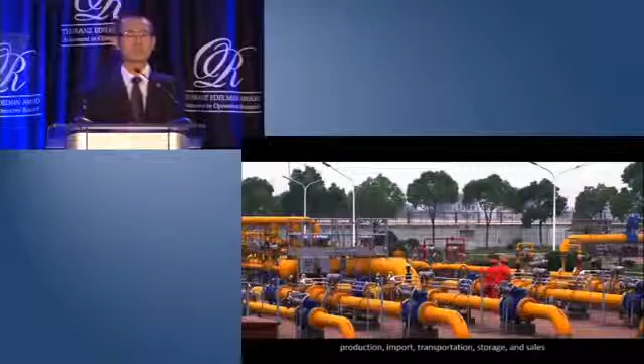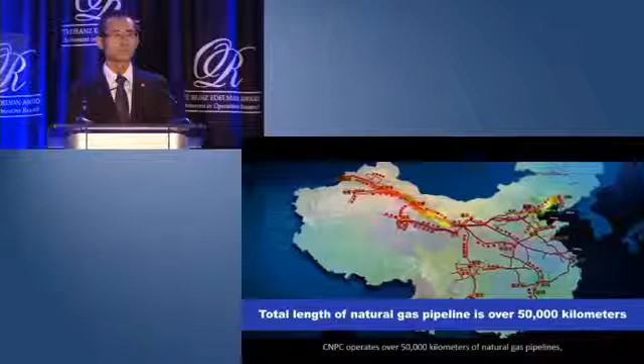CNPC, China National Petroleum Corporation, is China's largest oil and natural gas producer and supplier, and is an integrated energy corporation with business covering natural gas production, import, transportation, storage, and sales. In 2014 to 2017, CNPC ranked the top 4 in Fortune Global 500. CNPC operates over 50,000 kilometers of natural gas pipelines, which is the second largest natural gas pipeline network owned by a single corporation around the world.

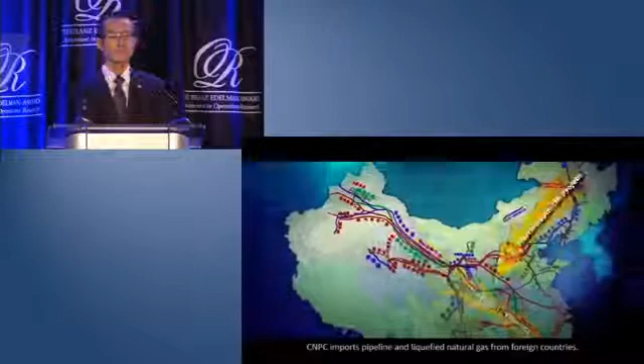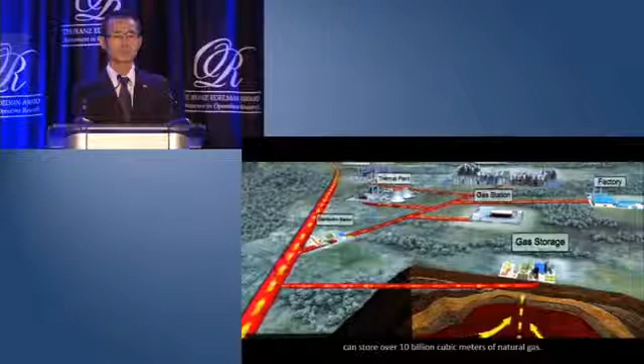CNPC has built 4 major natural gas fields in Sichuan, Tarim, Changqing, and Qinghai, with an annual production capacity of more than 100 billion cubic meters. CNPC imports pipeline and liquefied natural gas from foreign countries. Each year, CNPC delivers over 150 billion cubic meters of natural gas to over 5,000 end users all over the country. The underground natural gas storage owned by CNPC can store over 10 billion cubic meters of natural gas.

Okay, Professor, please. As we can see from the video, CNPC plans to play a major role in promoting natural gas in China. However, as of 2014, it was unclear whether China's pipeline network had sufficient capacity to meet the increase in demand. It's not easy to answer this question, mainly because of two reasons.

First, there are thousands of nodes in the network. The network is interconnected and forms many cycles. Second, the physical laws governing the relationship between flow and pressure in the pipeline are highly nonlinear and non-convex.

To help CNPC make better decisions about their pipeline network design and supply chain optimization, we plan to answer the following two questions. One, how much natural gas can be transported by a given network? And two, what is the optimal transmission plan based on the location of the supply and demand and the different purchasing and sales prices in the network? We plan to address these questions by integrating flow dynamics equations into an optimization framework.

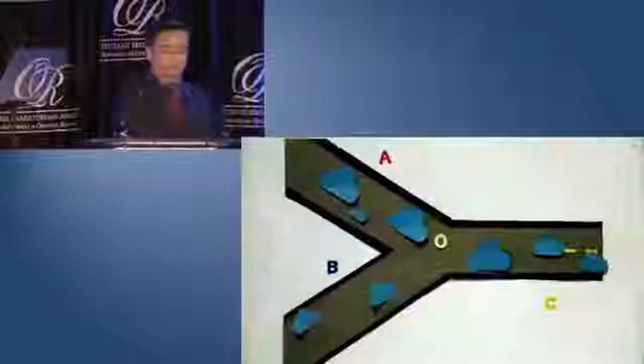In a road network, the control is the number of vehicles per unit time. But in the natural gas pipeline transmission, the control is the gas pressure. If the gas pressures at nodes A, B, C are all 8 megapascals, natural gas stays static. If node C's pressure decreases to 6, natural gas starts to flow. If node B's pressure increases to 10, gas flows from B to A and C. When we change gas pressure, the flow directions and the gas flow rate change simultaneously and non-linearly.

Different from vehicle traffic, natural gas cannot just flow by itself. We need to control gas pressure and temperature to control the gas direction and flow rate. The relationship among gas flow rate, pressure, and temperature is non-linear and also non-convex.

Assume that we need to transport 10,000 cubic meters of natural gas from Xinjiang to Beijing in 1 month. We set the natural gas pressure at Xinjiang at 8 megapascal. As natural gas flows to Shanxi and Beijing, its pressure decreases to 7.5 megapascal and 5 megapascal respectively. What if the pressure at Beijing cannot be lower than 6 megapascal?

The first solution is to increase the natural gas pressure at Xinjiang so that the pressure at Beijing is above 6 megapascal. The second approach is to build a compressor at Shanxi to increase its pressure.

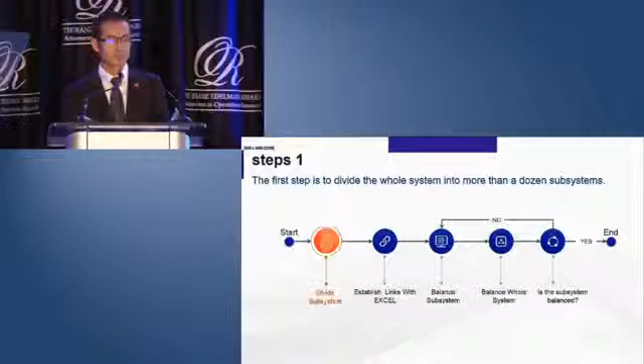Okay, before this project, we used the manual method and Excel to solve this problem. The next video will show us how we did it. The first step is to divide the whole system into more than a dozen subsystems. The second step is to establish the internal balance of production, transmission, storage, and sales amounts within each subsystem by using Excel.

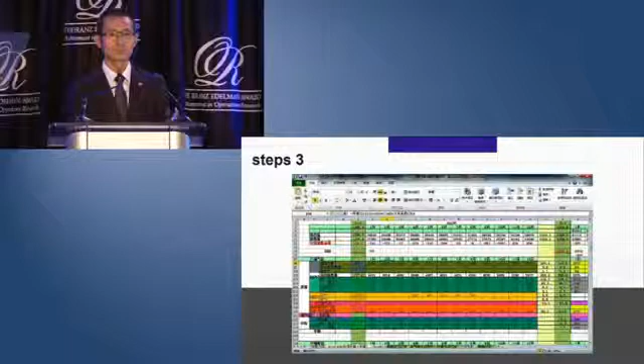The third step is to adjust the decision made in the second step based on management team's experience and feedback. The fourth step is to seek a preliminary balance among the production, transmission, storage, and sales amounts in the whole system by adjusting the interflows between each subsystem.

The fifth step is to check whether the amount of natural gas in each subsystem is balanced according to the preliminary balance of the whole system. If not, we go back to the second step and iterate.

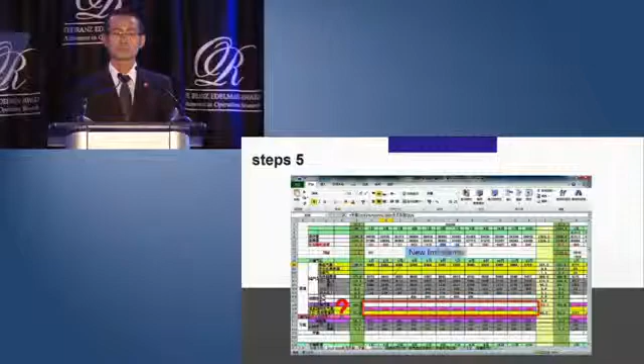Okay, the disadvantage of this manual method was that it might take too many iterations, both in the whole system and subsystems. It also relied too much on the engineer's working experience. So, different people often obtained different results. Most importantly, it did not guarantee the maximization of profits.

Furthermore, the manual method did not give us different or more scenarios. So, the next video will show us the disadvantages in detail.

We encountered a major management problem in 2012 when planning the natural gas usage for year 2013 to 2020. We divided the whole transmission system into 15 transmission subsystems and assigned the associated flow balancing tasks to 8 engineers. Each engineer was responsible for the flow balancing of his or her assigned subsystems.

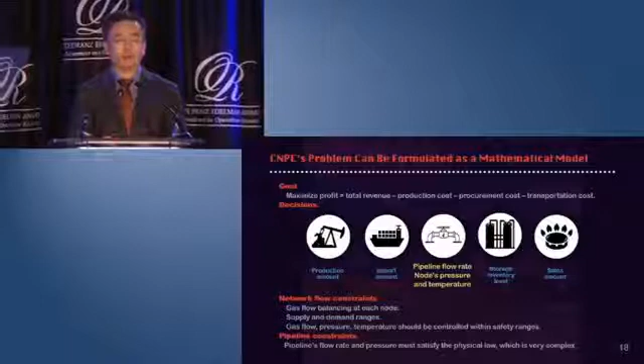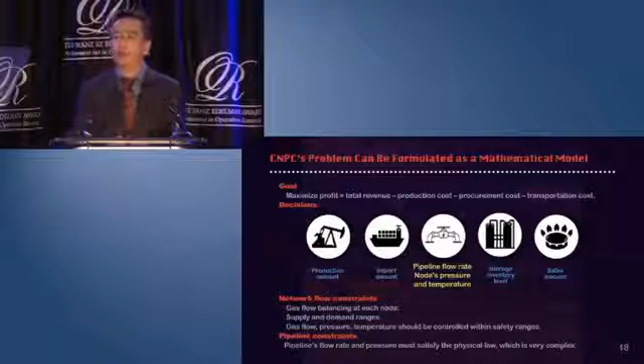It became apparent that the manual method will not work anymore for CNPC. Instead, our team came up with a supply chain optimization model where we try to maximize the profit by integrating production, import, storage, and sales decisions in the whole supply chain.

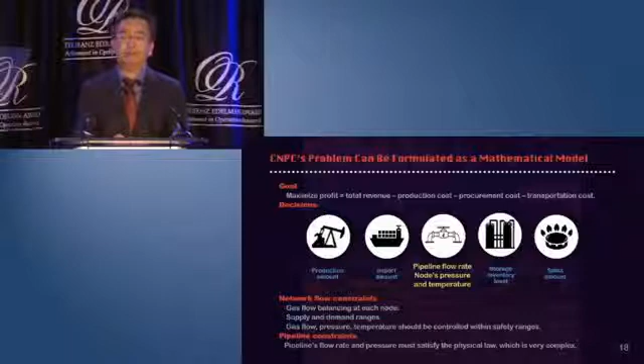If you look at the diagram, the key difference between this gas supply chain versus our textbook supply chain lies in the yellow part, where we explicitly model the pressure and the temperature and how they influence the flow in the network. We want to make sure the model will satisfy these two constraints.

In the network flow constraints, we want to make sure the gas flow is balanced at every node. Supply and demand fall in the right ranges, and gas flow, pressure, and temperature are controlled within the safety ranges. And in the pipeline constraints, we make sure that the pipeline's flow rate and pressure satisfy the following dynamic equations.

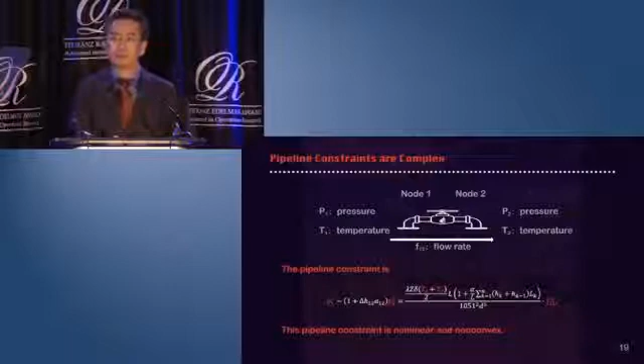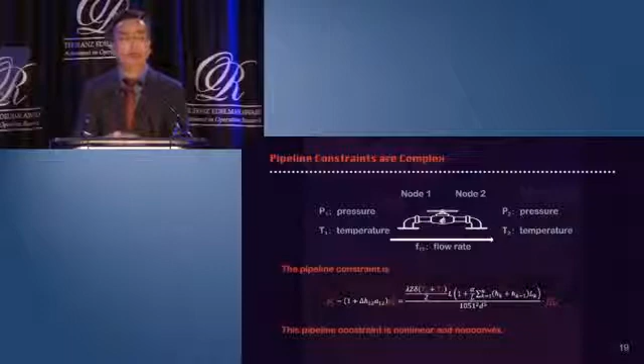The pipeline constraints that you can read from the PowerPoint are very complex. We just give you a simple example with only 2 nodes. Node 1 has a pressure of P1 and temperature of T1, and node 2's pressure is P2 and temperature is T2. And the gas flow from node 1 to node 2 can be expressed as a function of P1, P2, T1, and T2. It is clear that this constraint is nonlinear and non-convex.

On top of this nonlinear and non-convex constraint, there are several other factors that make the CNPC natural gas supply chain problems even harder to solve. The next video will show you all these complexities. The elevation difference between Xinjiang and Beijing is over 2,000 meters, which has non-negligible effects on gas transmission.

The demand in winter in China can be twice as much as the demand in summer. Price of gas imported from different countries varies much. Pipelines of CNPC form a large-scale complex network, which increases the complexity of the whole problem.

After considering all these complexities, we end up with a large-scale, nonlinear and non-convex mixed integer programming problem. This model has about 37,000 constraints and 15,000 variables. No existing commercial software can solve this problem.

Instead, we came up with two approximation methods to solve this complex problem. The first approach is a piecewise linear approximation, and the second approach is a three-stage convex relaxation method. In approach one, we approximate the nonlinear problem by a mixed integer linear programming problem.

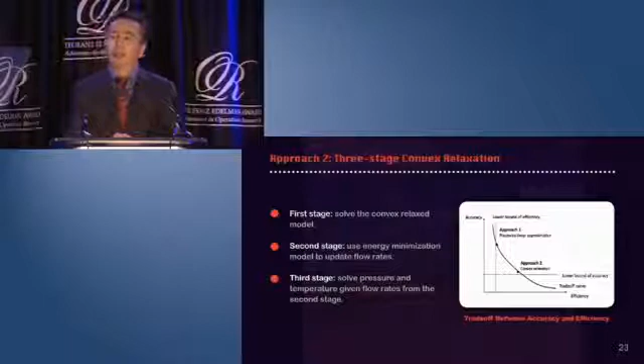In approach two, we use a three-stage convex relaxation approach. We first solve the convex relaxed problem. If the solution from this relaxation is not feasible, we then solve an energy minimization problem to get a feasible solution. And in the last stage, we solve for pressure and temperature given the flow rate from the second stage.

These two approaches have their own pros and cons. Approach one has higher solution accuracy, but requires a longer time to calculate. Approach two has higher computational efficiency, but is less accurate than approach one.

To validate our model and solution method, we have to answer the following two questions. First, can our model reflect the real pipeline characteristics? The answer is yes, because our fluid dynamic models are based on industrial standard and verified by field experts. And we further validate our results by comparing them with those from the specialized pipeline simulation software.

The second question is, can our approaches, our methods guarantee feasible solutions? For the linear approximation method, we use up to 20 segments to guarantee solution accuracy. For the convex relaxation problem, we first prove theoretically that we can find optimal solutions if the network structure is simple, such as a tree network.

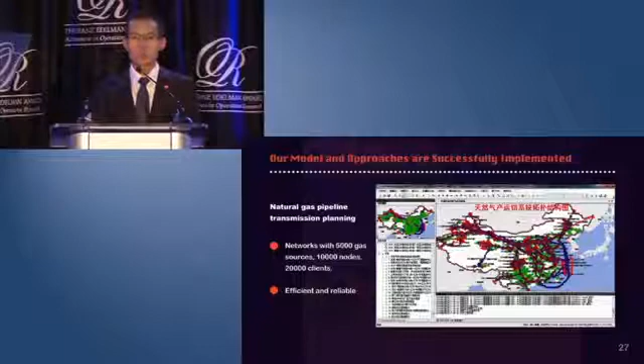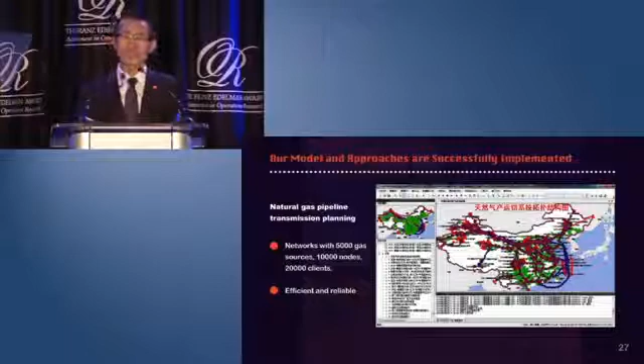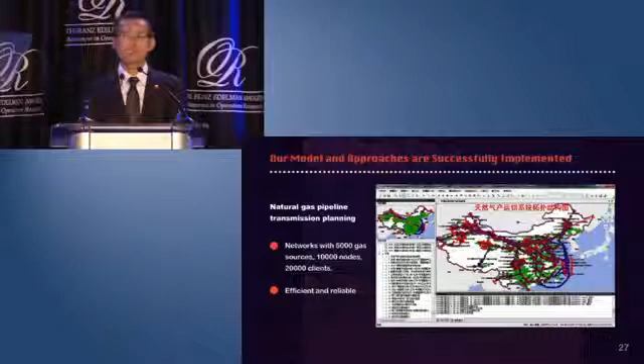Okay, based on the methodology introduced by Professor Sun, the project team developed a software to make plans on natural gas pipeline transmission in networks with any topology. The software can provide reliable plans in transmission systems with 5,000 natural gas sources, 10,000 nodes, and 20,000 clients efficiently.

Next, I will show you the basic functions of the software. The decision support system has 5 components: data input, data check, unit conversion, optimization, and data output. Data are first imported from the database into the optimization system and stored in the memory.

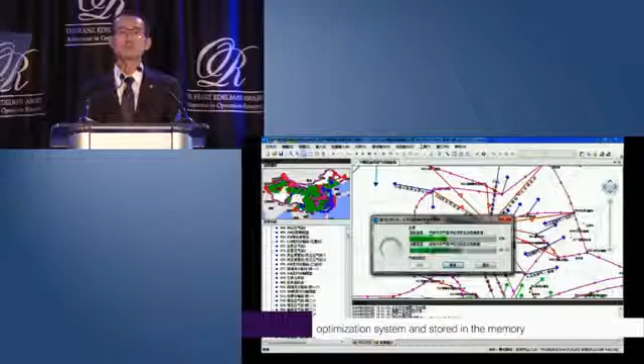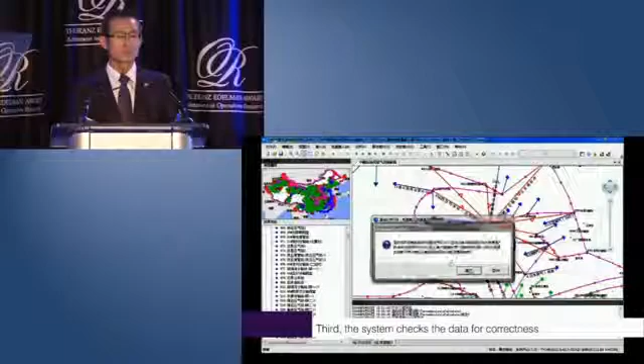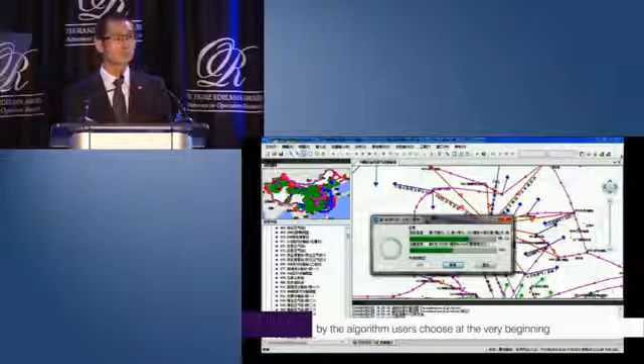Second, the original numerical data are converted into data with standard units. Third, the system checks the data for correctness. Then, the natural gas pipeline planning problem is optimized by the algorithm users chose at the very beginning. After the calculation is finished, the results are converted and output.

During software development, we worked to provide more choices for users and make the software interface more user-friendly. First, the main interface displays the pipeline network loaded from the database. In the software, the geographical information of each node is stored in the database.

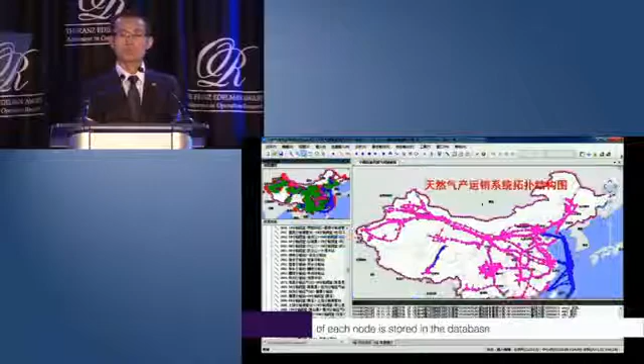The design is similar to that of commercial map software. The user can move, enlarge, and shrink the network similar to using a Google map. A user can also click on each node and arc to check its information.

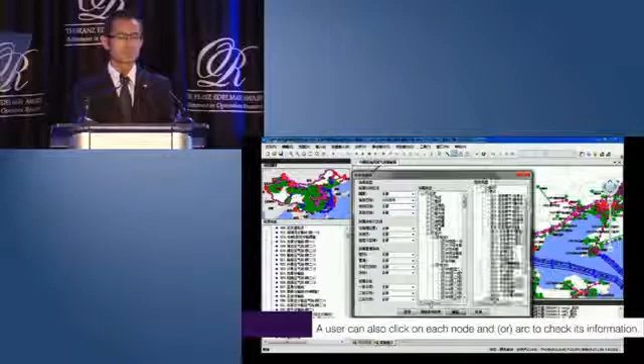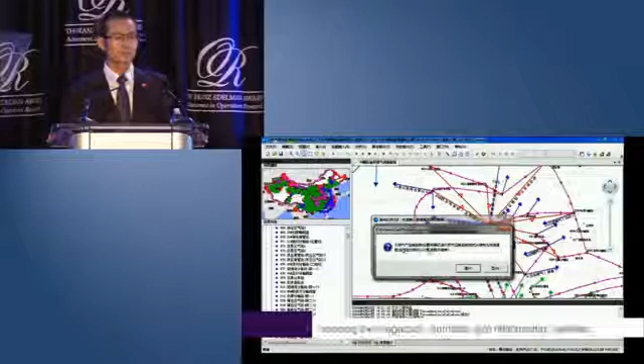Second, when the software is initialized, a user can select the objective functions and other system settings. For example, the objective function can be either linear or piecewise linear, and the physical parameters can be computed in various ways. Third, the team designed 9 levels of data checking, including magnitude, conflicts, size relationship, overlaps, network topology, and checking module required by other software like TGNet. Software is designed to give the error prompt and let users choose whether to continue the calculation.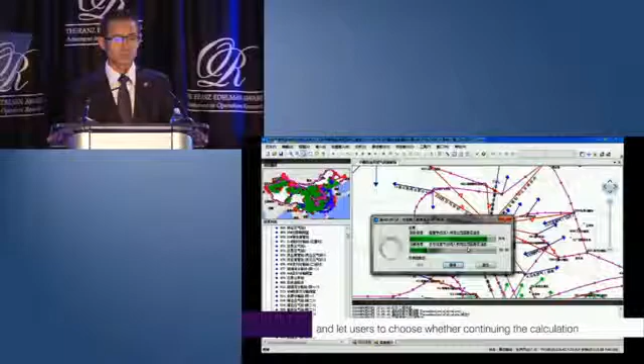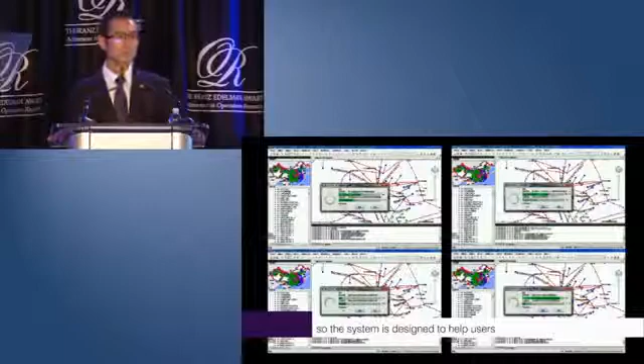Fourth, the users often do not want to wait too long without receiving any information. So the system is designed to help users learn the schedule of calculation. Okay, the successful implementation of our software significantly increased my company's profit. In the past 3 years, CNPC has obtained $530 million profit increment. This huge number included 3 components.

The first component, $340 million, was from the reallocation of gas selling amounts. According to the optimal plans from the software, we increased the selling amounts in the higher price areas and decreased the selling amounts in other areas. Therefore, we got more revenue.

The second component, $188 million, was from the reduction of purchase and transportation costs. For example, in 2016, we increased the amounts from the liquefied natural gas terminals, which were relatively cheaper, and decreased the amounts from the import pipelines, which were more expensive. The third component, $2 million, was from the labor cost saving.

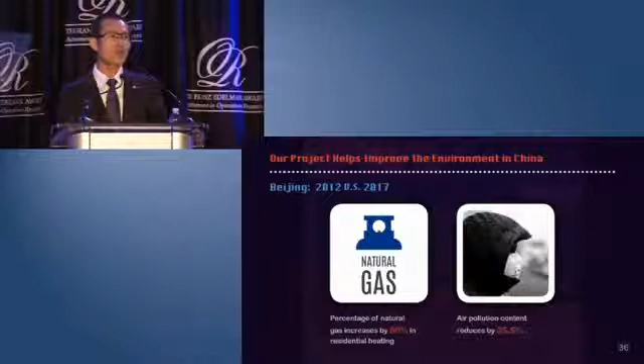The project has brought not only huge economic benefits for my company, but also significant social benefits. For example, with the rapid increase of natural gas usage in Beijing, the air pollution content decreased by 35.5% from 2012 to 2017. Mr. Xie Zhenhua, the special envoy of the Chinese president for climate change affairs, gave high praise and placed high hopes on this project.